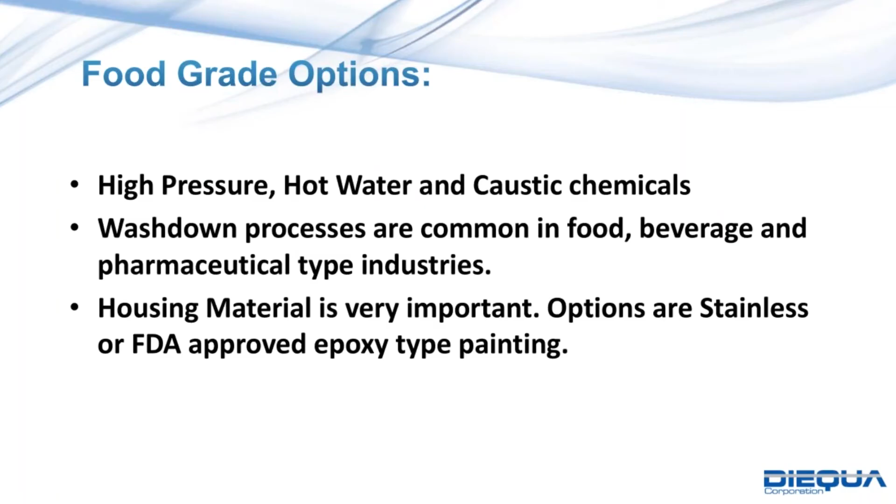The caustic will eat away at the housing, so depending on where it's located, you can go with a stainless steel housing, or you can do a white epoxy food grade paint. And the high pressure has an effect because it penetrates the seal.

The seal is between the shaft and the housing. If an improper seal is designed, then contaminants will get into the gearbox and it will fail, and or the oil or lubricant will leak outside. The highest degree of protection here would be a Viton seal, Viton O-ring, and any rotating member component to be Viton, because it has excellent capability to withstand high pressure and chemicals.

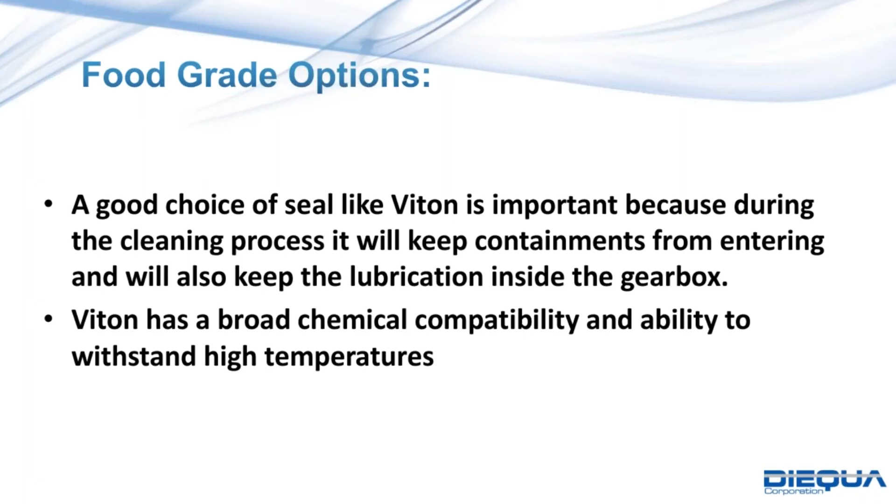Here at DieQua, all of our lubricants are H1 lubricants right out the door. We are partnered with Lubriplate, aka the Fiske Brothers Refining Company, and now made all of our gearboxes NSF H1 standard. The approval and compliance was the past responsibility of USDA, but now the NSF has basically adopted the USDA standard as its own guideline. They kept the same food grade designations, therefore you still see H1, H2, H3.

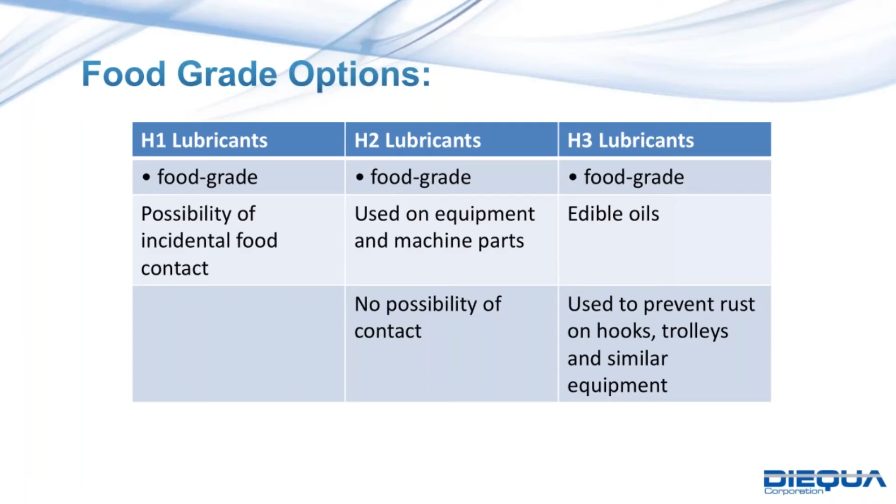It really depends on where it is in the line of the process, whether it's in the beginning stages where it's the raw form, or towards the end where it's packaging. So it does make a difference, and we do have several options. And now I'll hand it over to Michael, who will go over those real world applications for you.

Yeah, I just also wanted to recap just real briefly on lubricants. When you go into the food grade world, there is a very specific series of specifications for what type of lubricants can be used. The type of lubricants that you typically see in industry, which are mineral based, or like a polyglycol based synthetic, or some of those, they're not necessarily appropriate for the food grade industry, or the food industry.

The H1, H2, H3 is our various degrees of acceptability, if you will. I mean, the closer you get to the food, the higher the grade has to be on the oil, so that you limit the toxicity, if you will, of any kind of contaminant of oil that may come in contact with food.

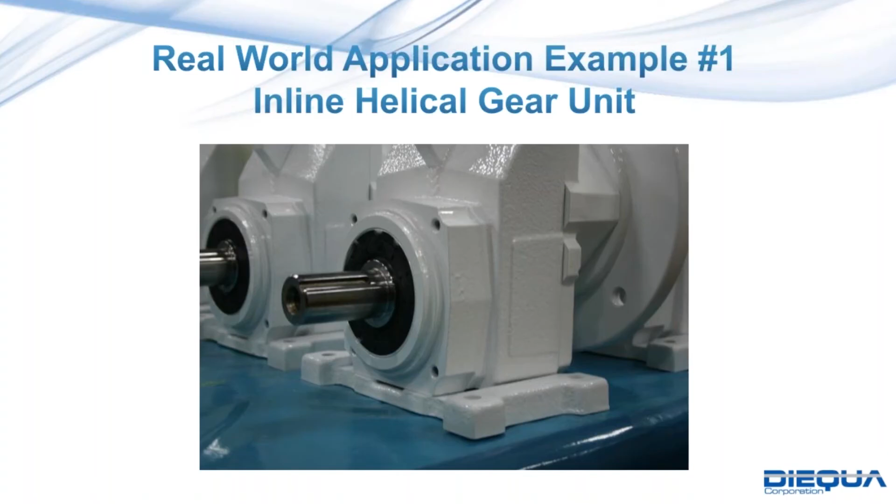So in this case, I forget what's on the next slide. What we have here is a gearbox where several things had to take place. One, we had some space constraints. Because it was down inside the cabinet and the motor was relatively large, it had to fit in a certain footprint. So in this case, we had to modify the input of this particular gearbox. It had to be made shorter. So we redesigned the casting, we made the shaft a little bit shorter, we changed the bearing setup internally in the gearbox to make it fit properly.

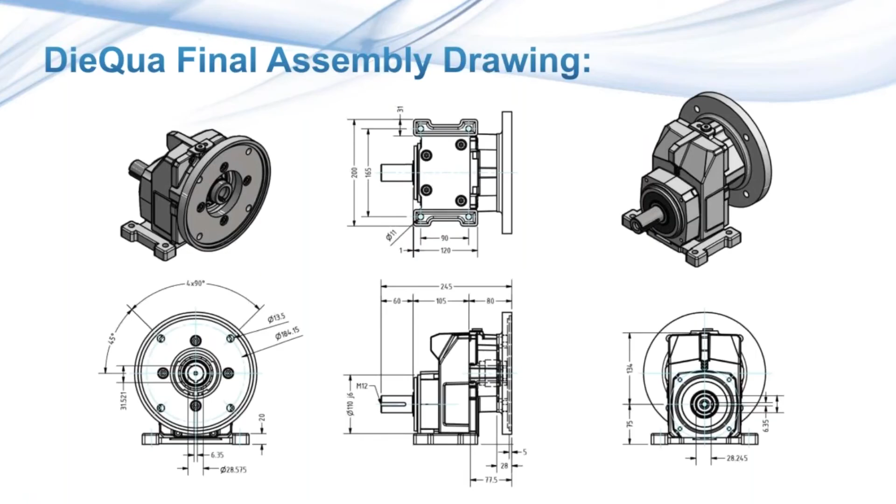The two other things that we did to this particular gearbox to make it compliant was an FDA white epoxy. So there's a specific coating that is approved by the Food and Drug Administration, a particular white epoxy. We use it quite often here in some of these simpler applications, and you can see it's white. And secondly, it obviously had to have a food grade oil in it. So we, in this case, used an H1 NSF standard H1 oil, not a grease in this case. And that's what the box was filled with.

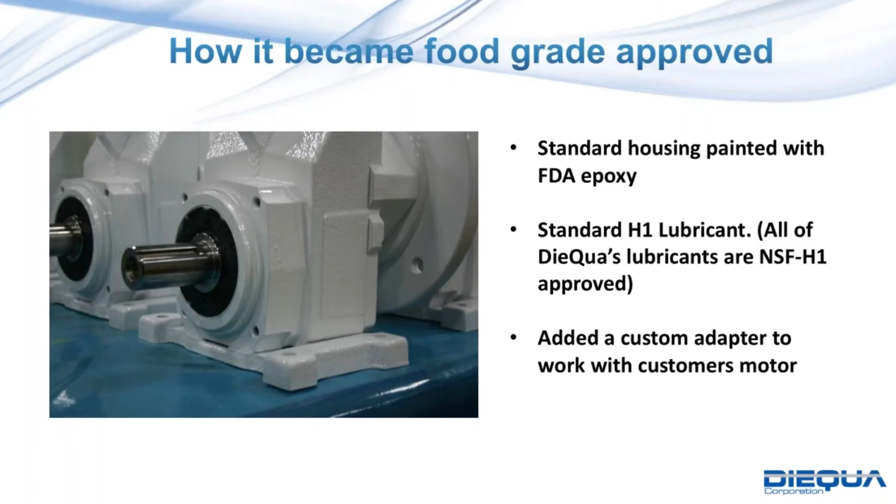You'll also notice that this has a standard seal in it. A Viton seal wasn't required here because this box doesn't see high pressure washdown.

Let's start talking about another example where we have a spiral bevel application. This one's going to get a little bit more complicated in the sense that it does require some stainless steel, and it does require a higher degree of protection from high pressure washdown environments.

Next slide, please. I think this is a good place to introduce what are called IP ratings. Now, IP ratings don't exist exclusively in the food world—they actually exist throughout the industry when we're talking about mechanical power transmission. IP ratings have to do with the degree of protection that the box must have. The higher you go in the rating, the more protection, or the more robust the seal area and certain other areas need to be on the box to keep the oil in and keep debris out.

The next slide actually shows the chart. There are two numbers associated with the rating. The first one is talking about dust protection, or the ability to seal the box. The second number talks about the ability of the gearbox to withstand certain types of fluids that are going to come in contact with the seal, and the severity with which those fluids are going to hit the seal.

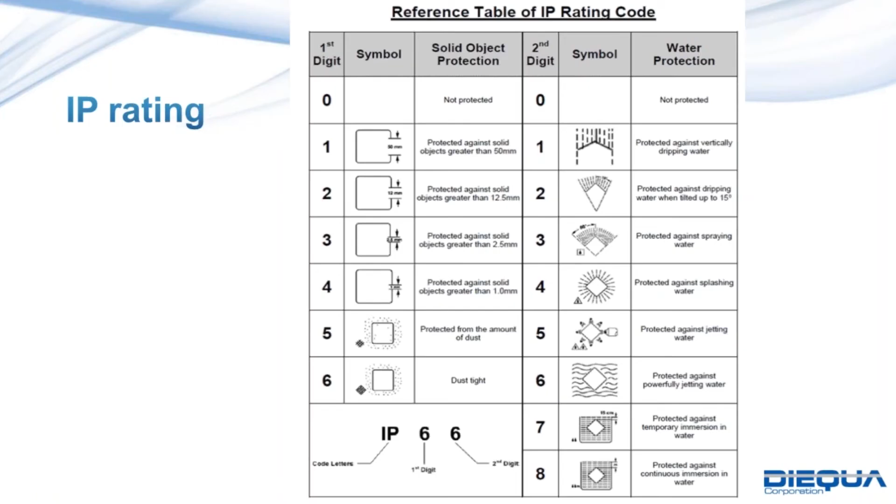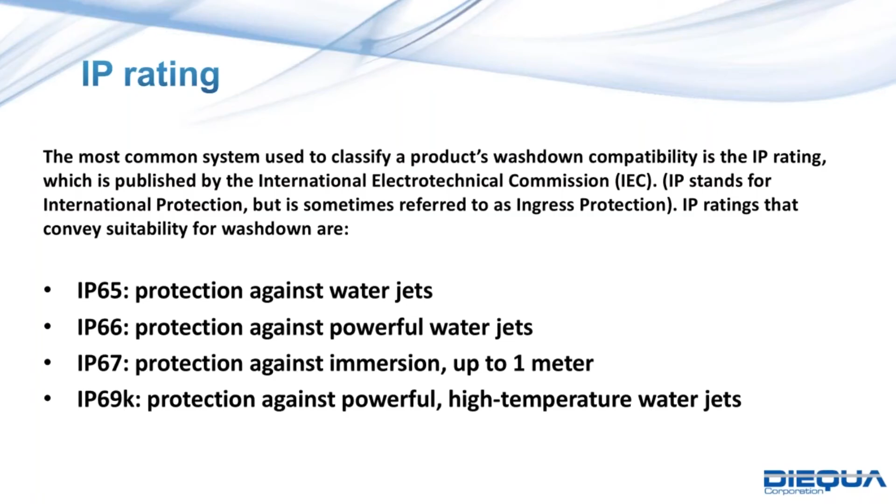The highest IP rating that we typically come across is IP69K, and we're going to show how we solve that problem in just a moment. IP69K is talking about very high pressure water, high temperature water, and also very often caustic chemicals that are associated with the sanitation of that particular machine, or the gearbox and driveline and all the components on the machine. So this is the most extreme protection that we need to prepare and design a gearbox for.

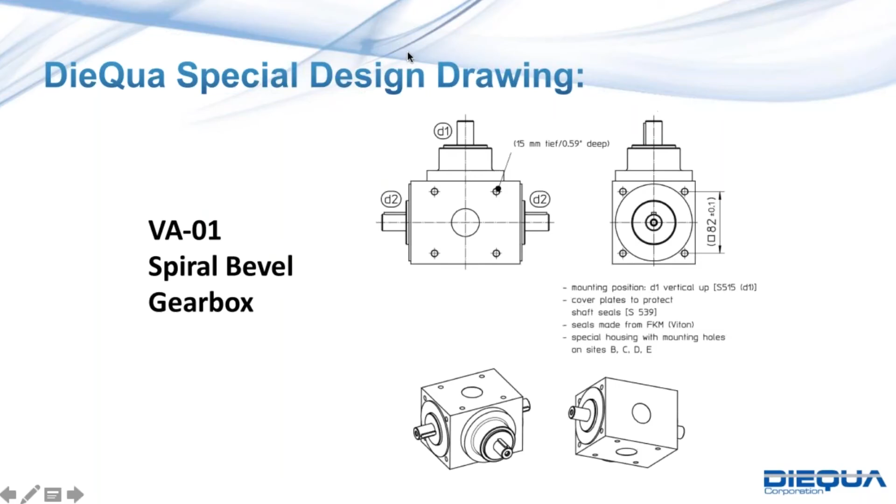As we go forward, typically when we go into gearboxes that have to withstand caustic scenarios, we have to be very conscious of what the housing material is. This is actually showing a spiral bevel gearbox where we have an all-stainless configuration. That's generally the most expensive design option that folks will typically have to be confronted with.

Also, you generally do not want any kind of cavities or areas on the outside of the gearbox where liquid can pool, because if liquid can pool, that means a pathogen has the ability to grow. So in all-stainless products, we generally don't put mounting holes on all sides of the gearbox, which is typical on a standard gearbox—we only put those mounting holes on surfaces where they actually need to be in order to mount the gearbox to the frame or somehow attach it to the machine. These are kind of things that we ferret out prior to coming up with the final design, and this is just a typical drawing of that.

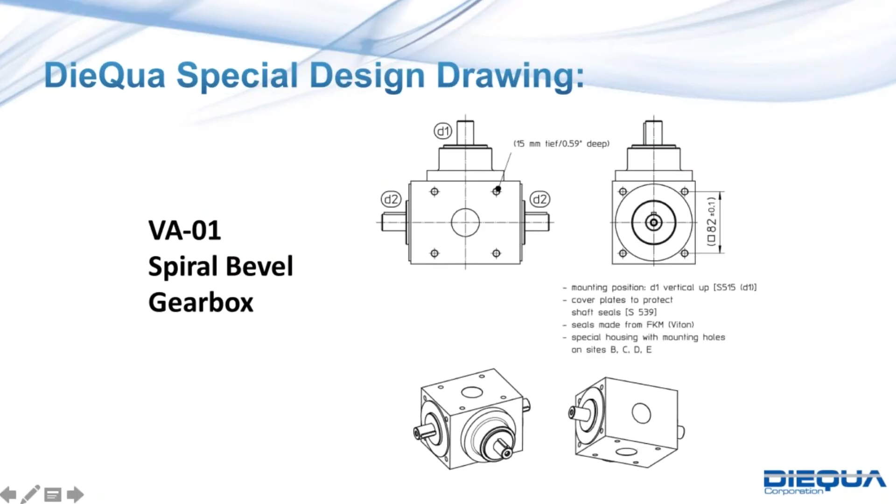And I think the next slide—so we had a kind of very interesting application. This goes back a few years. It was one that I personally worked on.

It was a little bit more complicated, and we'll have a slide a little later on that shows some other elements we needed to add to this. If you take a look at the seal area, you'll notice you don't see any rubber, and that's because there is a stainless steel shield pressed onto the shaft that rotates with the shaft. The end plate has a slight groove cut into it that the shield fits into.

So it solves two problems. One, it mechanically protects the seal. If somebody were to take a high pressure wash wand shooting at 1500, 2000, or 3000 PSI just a few inches away from the seal, if that seal didn't have mechanical protection, it would blast right through and the gearbox would fail. So this protects the seal. There's a mechanical shield there, and also as that shaft spins, it acts as a slinger, so that any debris or liquid in the seal area is thrown away using centrifugal force.

Other elements of this gearbox come into play from a cost scenario. The last slide Hitesh talked about showed relatively less complex gearboxes are less expensive. The more complex and more stainless-oriented gearboxes get more expensive. This is toward the higher range because this gearbox has a stainless steel through shaft. The end plates are stainless. The pinion is not stainless because we want a one-piece pinion, which is the strongest pinion design. The part coming out of the gearbox is hard chromed to protect it.

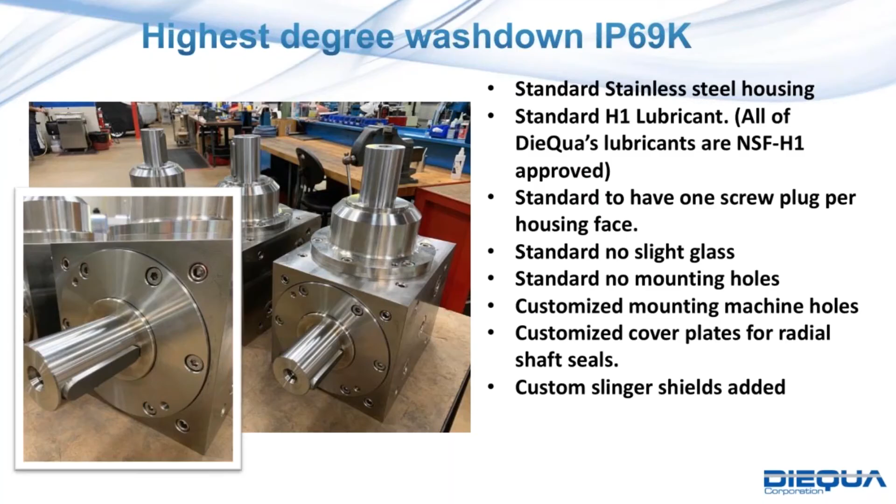The final application we want to go into detail with is in the world of automation, which we're seeing more and more of. There are really two major elements out there: the standard PT world using squirrel cage motors without a high degree of automation, you turn them on and they run, like conveyors or bakery equipment. But we're also seeing machines being asked to be very flexible, so there's a high degree of automation coming into the industry. With automation come gearboxes that have to be servo driven, which is a bit different. This happens to be a servo worm gearbox.

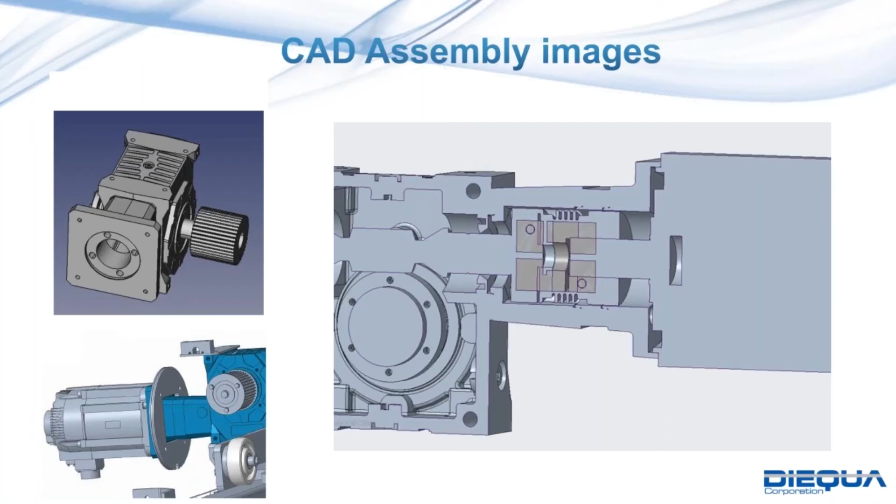So there were some spacers that we needed to design, and they were made out of stainless steel. Generally speaking, this is a gearbox that's got an aluminum housing. Aluminum is a relatively robust material, but it just kind of depends on what the cleaning process is and what kind of chemicals are going to come in contact with this particular material. For this customer, it didn't need to be anything more complicated than aluminum, so they didn't require stainless steel per se. We'll show some real pictures of the application in just a moment.

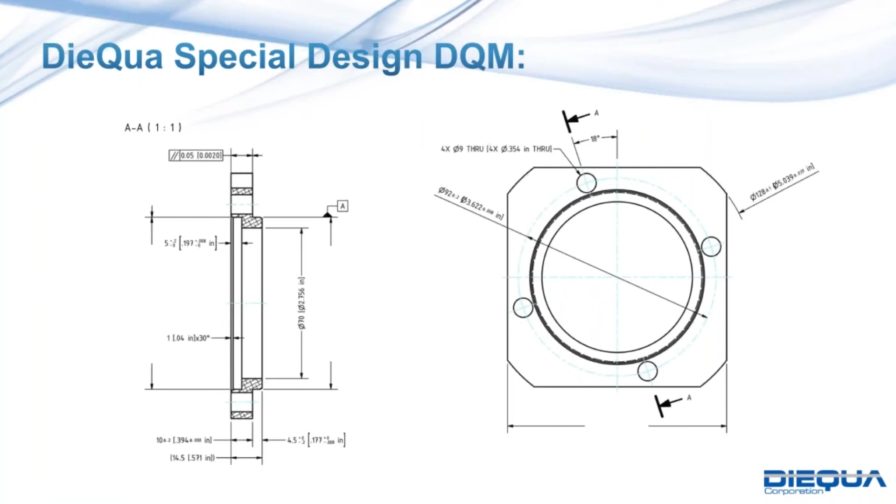So this is one of the spacers that we made for it, just to create some more distance between the motor and the gearbox for heat issues.

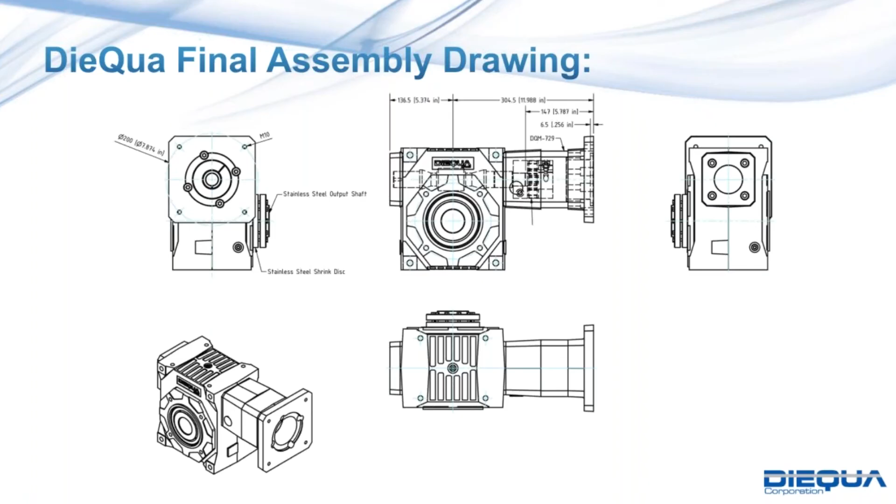This is typically how we work with customers. So we make the design. There's a full up drawing, 2D, 3D, and usually we'll work with CAD, 3D CAD drawings for customers so they can automatically put it into their equipment.

We have one issue with this customer: as they were going through the whole prototyping phase of getting this machine to run, they constantly had to take the motors on and off. What they noticed is that with the bellow coupling, that was arduous, that was a problem for them. So in this case, we were able to switch that out to a different type of coupling.

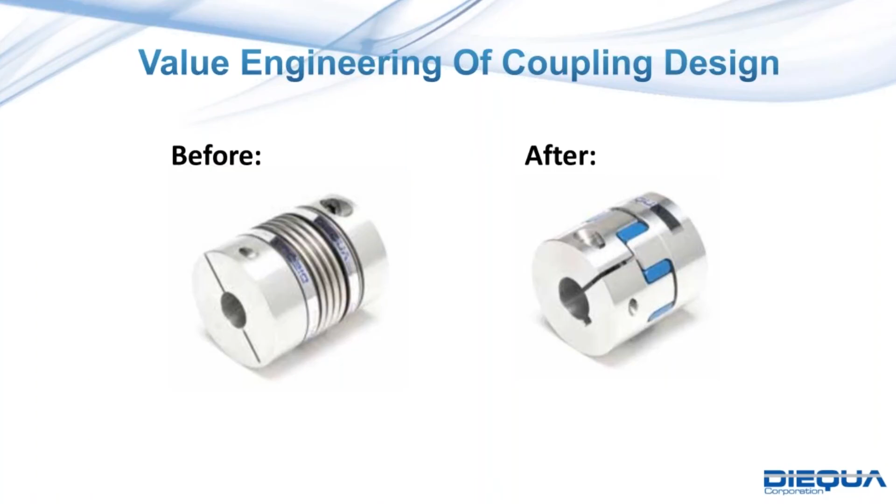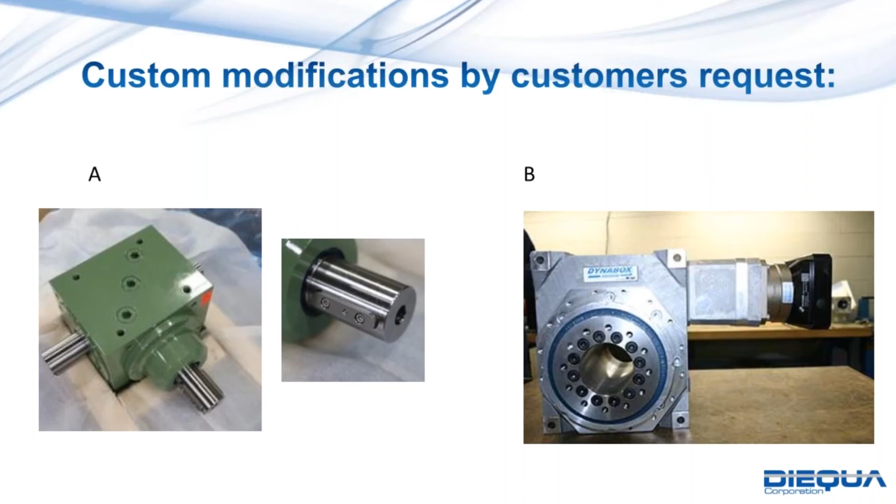Going back real quickly, this is one of the prototypes we did for that stainless gearbox solution I told you about before. Those bladders you see here are stainless bladders, connected to the gearbox with stainless hardware. Those bladders are also pressure differentiators, or pressure differentials, if you will.

They're pressure balancers. The box is sealed, because very often in a food grade environment where there's a lot of liquids being used, you cannot have a box with a breather, because you don't want that to be an ingress point for liquid or contaminants getting into the box. That being said, very often during the sanitation process, they may bake the room or the piece of equipment up to 150 degrees C to kill off pathogens.

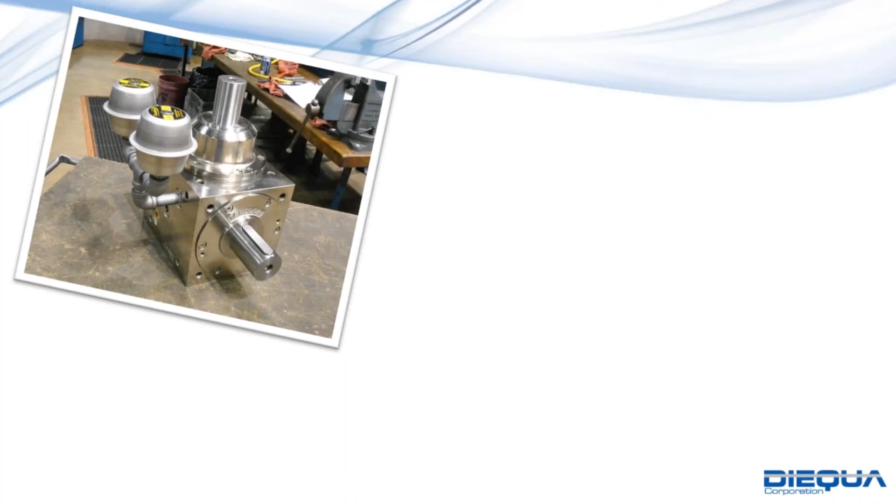But when you do that, the pressure goes up in the box, and when it cools down again, you basically create a vacuum, and any debris would come right through the seals. So we solved that problem by putting these pressure balancers on there, so the box always remains at constant pressure on the inside, and the bladders take up the differential in pressure. That's a simple way we solve that pressure differential problem and keep the box sealed.

This is another example of gearboxes where weight was a consideration. These are all aluminum gearboxes, but they have a special treatment to the aluminum housing called Tanox. Tanox is, in essence, like a case hardening process, and what it does is make the surface of the gearbox impervious. It hardens it so it does not corrode or pit, and it's an alternative to stainless steel, a less expensive alternative.

You can see here also the screw heads are not socketed cap screws, which have wells in them so you can put an Allen wrench in. There are a couple of holes in the boxes, and the customer would plug those holes, so this box becomes something where, when it gets wet, it cannot hold any liquid anywhere -- it just drains away. You can also see on the side of the housing there are 4 holes, and those are the only holes in the side of the housing for how they attach the box to the frame of the machine. So that's just an example of how we've done it.

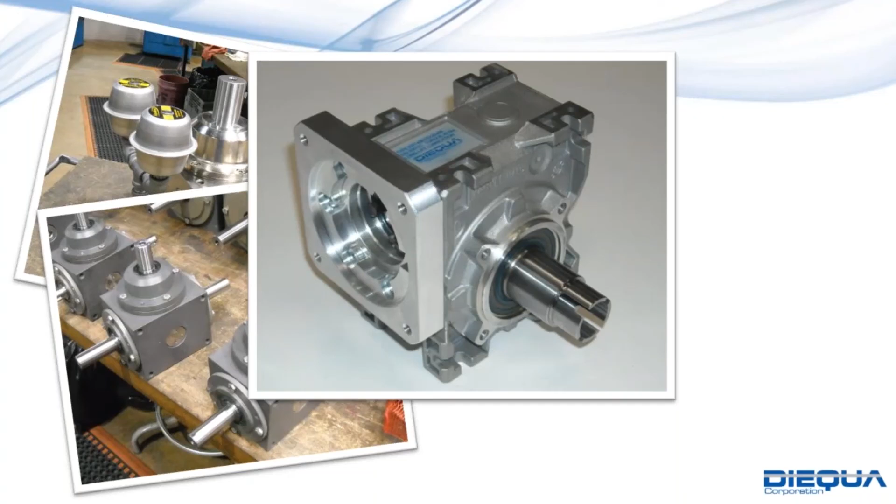Also, custom output shafts are a little bit longer, and so on. This is another example of a servo, but not a high performance servo in the sense of very low backlash -- it's standard industrial. It has a stainless input flange, and a stainless steel custom output shaft. That was a relatively low cost modification.

So, getting the oil out of walnuts, or making sesame oil or pumpkin oil.

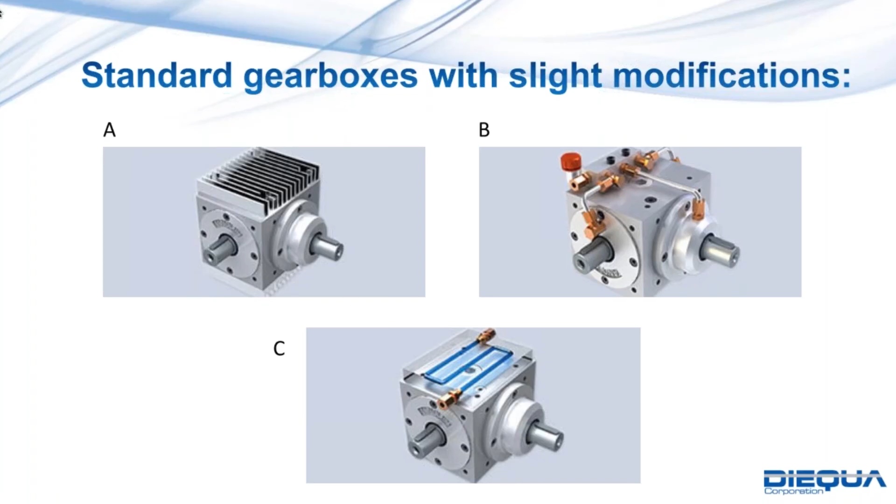So we're making modifications to a particular box where we're more or less at the limits of the gearbox. We want to test the internal components to make sure they're sufficiently strong. We run a finite element analysis tool to find the weak points and modify the internal components as necessary—for example, changing out the bearings or making the gearbox more robust when we increase the size of the tooth. These are the tools we have at our disposal when designing custom gearboxes to their limits.

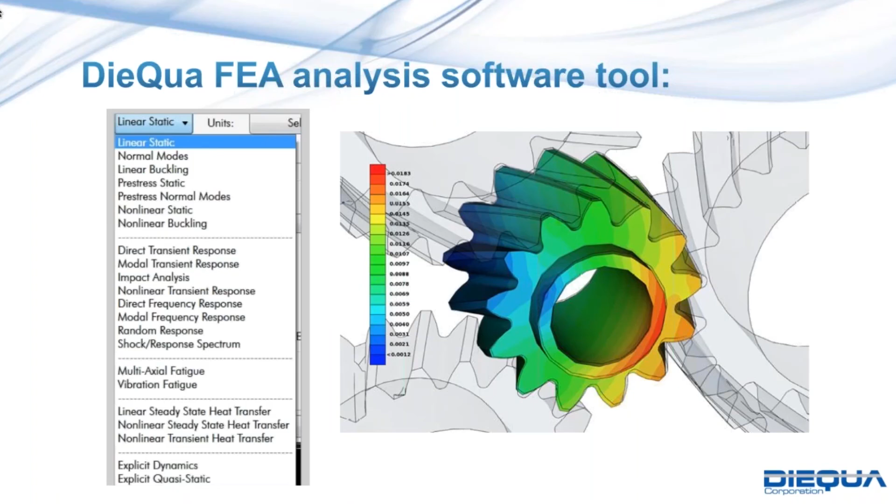There's a lot of data in this chart. The most important thing to note is that we went through a lot of effort to determine the range of different greases and different types of oils, both mineral and synthetic, and now they're all at DieQua NSF H1 rated. We worked with our supplier to specifically formulate each one for each type of gearbox to maximize its ratings. This is where we started as a company, doing our research to have everything that goes out the door as NSF H1 lubricated.